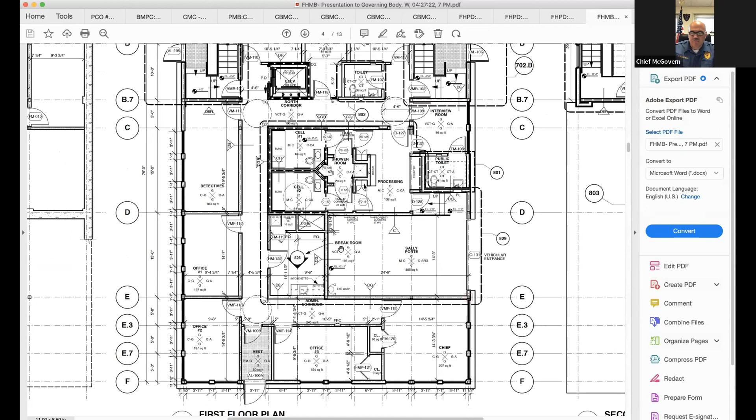So let me ask it this way: what bathrooms are not technically required according to state guidelines for police departments? Well, I think one of the things is that second bathroom downstairs is a handicap bathroom, so you're required to have at least 1 handicap bathroom on that floor. Eli, correct me if I'm wrong, but then we put a very small bathroom in the interview processing room. Correct, you can see that on the screen, right? Everyone see that? I see it, yes. These are the ones required for the cell block itself. This was meant for the staff on the first floor, and this was meant for visitors.

Are they all required? Well, these are absolutely required. You should have something for the public, as to whether, there's no code requirement for one for staff. I suppose you could perhaps consider this one as optional.

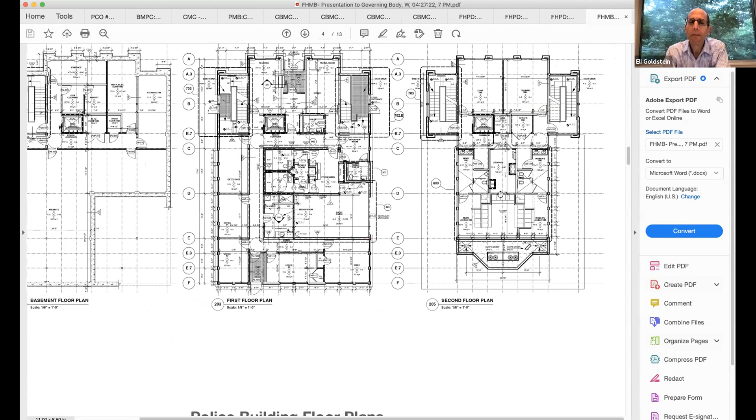And then what's the cost per square foot on the excavation and foundation work? Because I think we need some basement, but what was the cost per square foot so we could start to understand? I couldn't tell you that off the top of my head, I'd have to go through and pick pieces out of the estimate. It's the cost of excavating, the cost of drainage, the cost of waterproofing, the cost of the concrete, all those costs. It's not an easy answer.

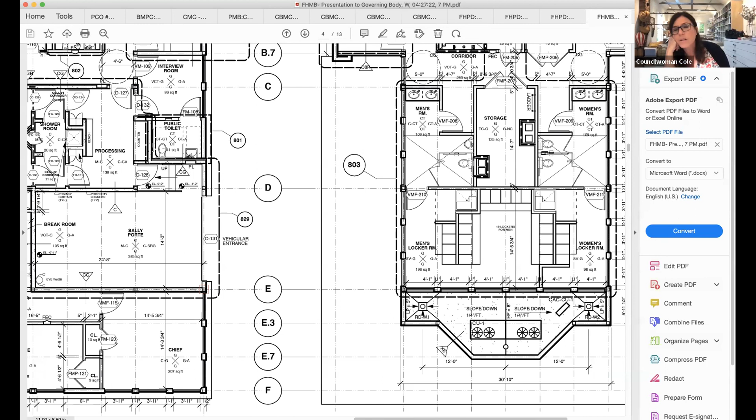So where can you limit the basement without dramatically altering the structure itself? Let's look at the basement.

Right now you can see there's structural columns here, and there's a structural frame above this area, that's the area of the storage. So to change this and get rid of this part of the basement would affect numerous drawings, both architectural, structural, mechanical, electrical, site. It would affect dozens of drawings to eliminate this.

Well, it's a shame we didn't also get the specs affected before now, but elimination of doors and frames and hardware... so what I was asking you, because I certainly understand that, but...

Where can we limit the basement? Perhaps on that south side here. Is there any way to limit the basement? If you got rid of the storage area, the basement could end here, and everything above it would stay and everything down here would go.

It would be good to understand what the savings may be. We do have other buildings that can receive storage, but Chief, can you tell us how critical the storage in the basement is?

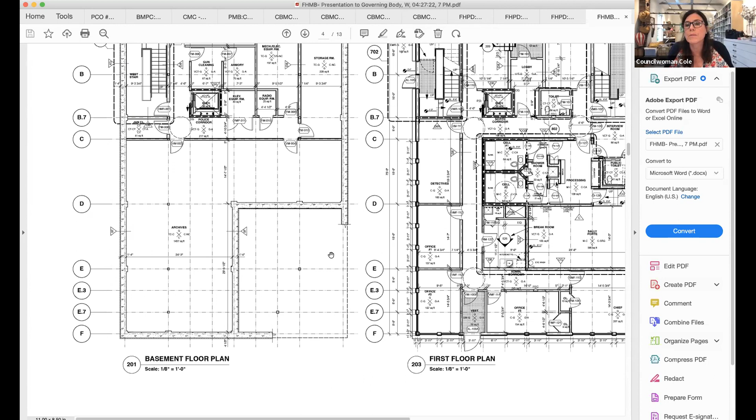All right, I did hear Eli say that. I feel we're in a difficult position because we have an expensive building and an expensive time to build buildings in a community that doesn't have a lot of money to fund buildings. So perhaps the other council members have some ideas. I'll circle back if I have any more questions.

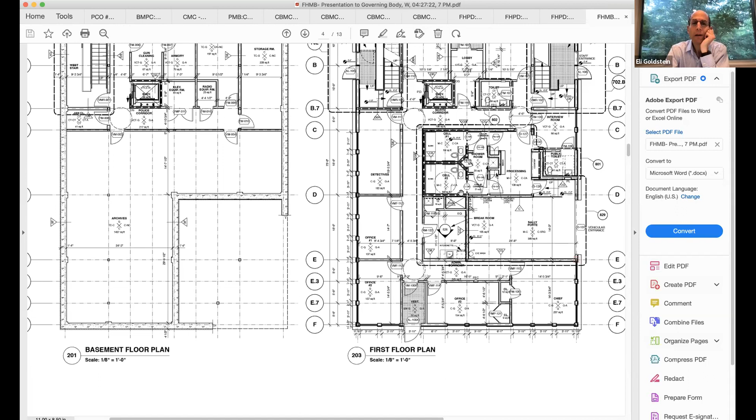Eli, do you remember how much the change in cost was when getting rid of that basement area to the west of the Sally Port? Was there a delta on that? I don't recall. Don't recall.

All right. Other question, you said residential siding. Can you specify what kind of siding we have? Is it Hardie or is it vinyl? It's Hardie board, yeah. What's the life expectancy compared to Hardie board versus vinyl? Is there a difference?

Well, actually, I just went through this on another project. I think they have pretty much the same length warranty, but the problem with the vinyl is that it needs a smooth surface in which to attach it. And there was a code change a couple of years ago, which requires us to put what's called continuous insulation on the outside of the studs before we put on the siding.

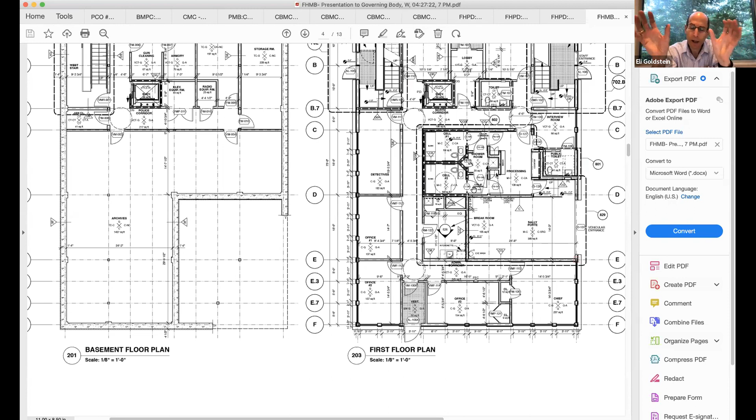And the system that's specified and detailed is one in which there are, this is a term of art, things called girts, which are like channels every 16 inches, which hold the continuous insulation to the studs. Those channels have thickness to them, so as a result, we do not have a planar surface. There's a bump every 16 inches. So we don't have a planar surface to attach vinyl to. As a result, we'd have to completely redesign the innards of the exterior walls if we wanted to go with vinyl.

Okay, thanks for that explanation. No further questions. Thank you, Councilman McHugh.

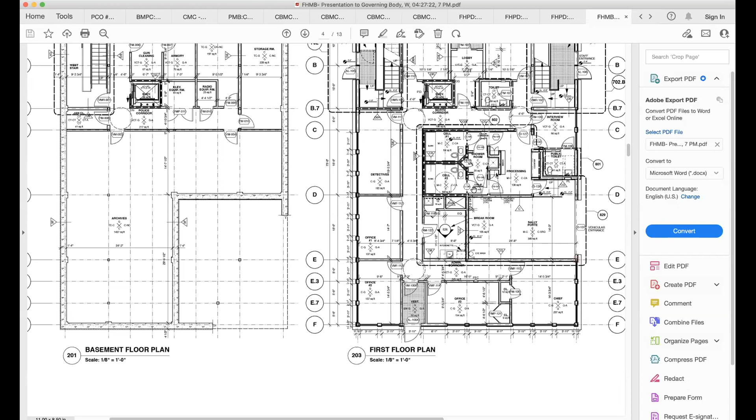Sure, thank you so much for that feedback. I appreciate it.

Councilwoman, do you have more questions? No, I guess nobody else has any feedback from the committee. Okay, thank you, Councilwoman. Eli, I think now would be a good time to talk about that back building.

Mayor, sorry, sorry, I know I did have an additional comment or question, sorry.

Councilwoman Cole, I just want to echo some of your comments that if there are opportunities for savings that make sense, a lot of small things can add up to a larger sum, and to the extent it's possible, that would be super. Also, I think we should be mindful of the mounting and increasing costs that are continuing, and I support proceeding to get this project initiated, shovel in the ground as soon as we can, but obviously with a mind and eye toward where we can make decisions that will impact the savings.

Do we currently have a plan for who will be primarily responsible for making decisions like that?

Such as this toilet or that toilet, this one's $500, that one's $1,000, things like this. Well, I would suggest, and I don't know who's prepared to answer that question, but in my mind, I thought we could do some items as an add alternate when we bid it out. So for example, the masonry stone siding, that could be an add alternate, and we can understand the cost difference. Actually, that would be very hard to do.

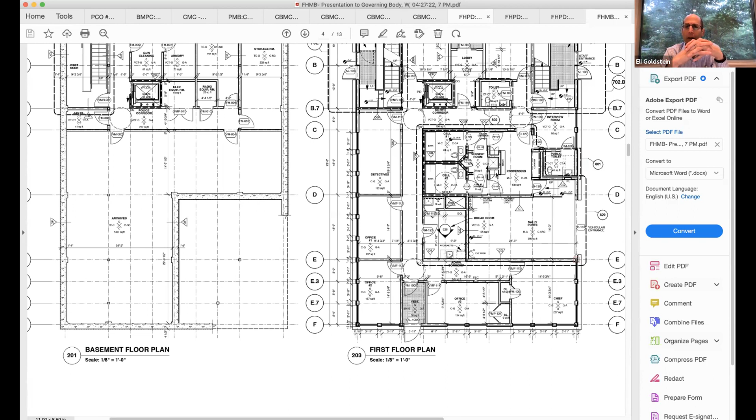So that's one of the reasons why we discourage alternates that are relatively small in the overall scale of the project. For instance, while it would be true that the bathroom near the front lobby of the police department, if it weren't outfitted, you might save, let's just throw out $15,000, if it didn't have the fixtures and tile in it, that's a drop in the bucket in a $10 million job. So whether that should be part of this ranking system, you'd have to decide for yourself.

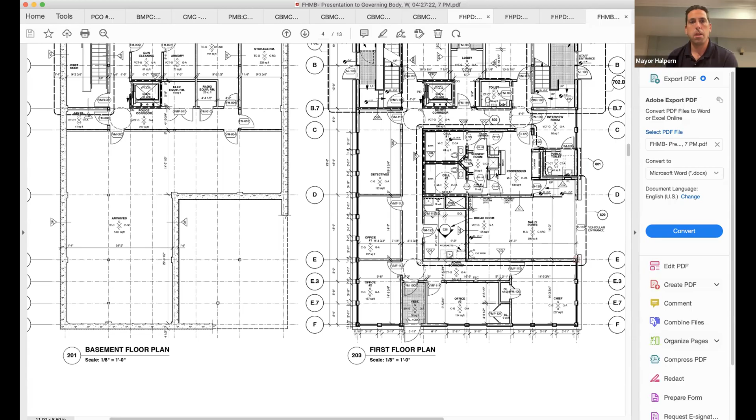Thank you. With no more questions on this topic and limited amount of time, I'd like to move on. Eli, if you can present on what was originally a back storage building and now has been discussed as possibly being meeting space. I do want to keep in mind that Eli was not asked to design this back building. He was just asked to give us an idea of whether it was doable within the open space, or within the ROSI space we had the restrictions on, and whether or not a general estimate on a budget of what the first design versus the enclosed community center space would look like.

So bear with me just one second. Everyone see that? Mhm.

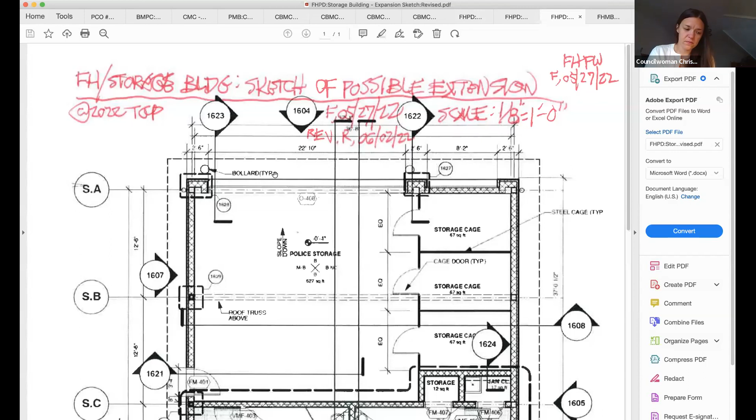Okay, so as we discussed in the last meeting, as currently designed, there's a patio here that's 20 feet deep and 37 feet wide. And what we're asked to do was to add a bay of another 10 feet here, making a room that was 1,100 square feet as a multi-purpose room.

And then we proposed adding doors out here and here. So you have these two means of egress, which we're required to have, and you come through a vestibule to get in the building.

Then we also tucked a kitchenette here. The plumbing in the bathrooms, of course, was part of the original job. This was a good place to put the kitchenette because it's recessed and can tie into the same plumbing as the rest of the building, and still maintain barrier-free access to the bathrooms. So, and of course we can fine tune this, but this was the basis for our estimate.

So we asked our consultants, site and civil engineer, structural engineer, mechanical and electrical engineers, and we all went through and figured out what the implications of this would be. It adds foundations, it adds roofing, it adds roof structure, it adds columns, it adds walls and windows, it adds doors, frames, and hardware, it adds the kitchenette, it adds a ceiling, it adds flooring.

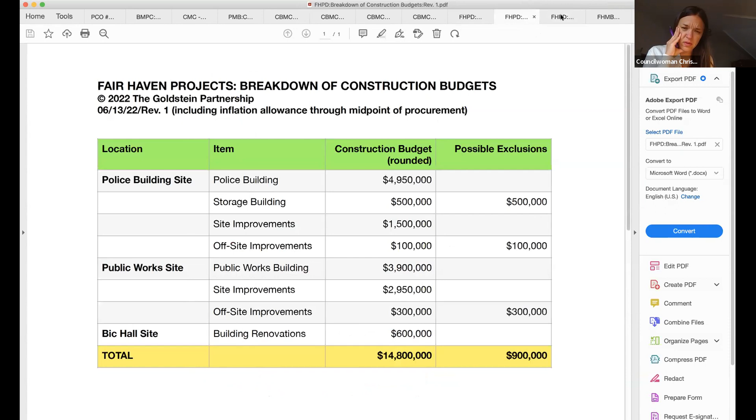Size-wise, is it comparable, smaller, or bigger than the existing community center building space, floor space? It's a little smaller, just slightly smaller, 200 square feet.

One of my comments, just so I can understand it, is the kitchenette open to the room? Is that accurate? It's more like a bank of cabinets, right here, and whatever, refrigerator.

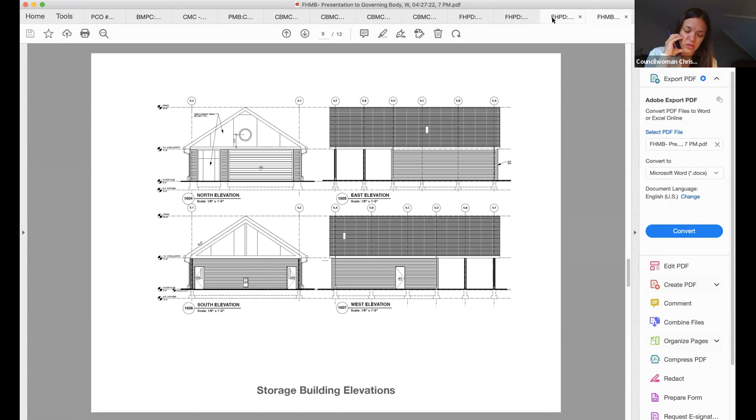Is the concern that you don't want to see it always? Or that if you are kicking a ball around or whatever, you might knock over the thing of milk? What I would like to suggest, if we want to get the most use out of the room, is we could just put a big set of doors that you can flip open against the walls and close it when you don't need it. But we're trying to keep the room as unobstructed as possible to give you as much flexibility as possible.

What are the dimensions? 30 feet this way and 37 feet this way. Okay.

It's hard to tell from this drawing. Are there windows proposed? Yes, there are windows proposed around these sides. Is that at a certain height above ground level? We haven't designed it yet; we just made an educated guess as to how big they would be.

Correct me if I'm wrong, but I don't see any storage space for the multi-purpose room. Currently none is shown. We could certainly add it, but that would just add a few dollars more.

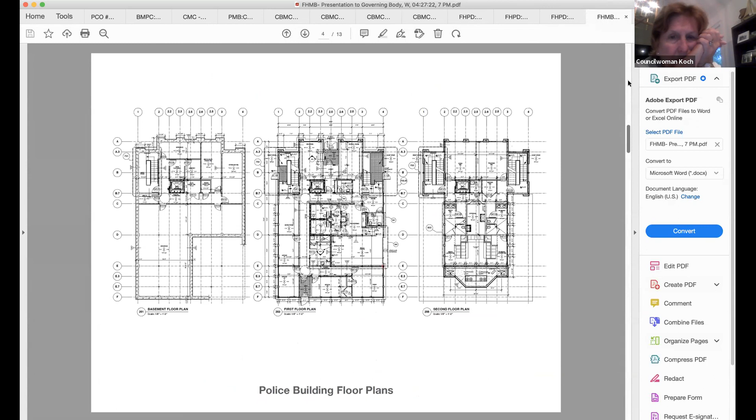So I just want to make one comment, and I agree the current configuration needs to be refined, but keep in mind my understanding is that you want to be able to get to the bathrooms and use them even if the multipurpose room is closed. So there's going to have to be some combination of interior and exterior doors so you can use the bathrooms as an adjunct to the multipurpose room at times, and other times use them from the outside without going through the multipurpose room. Keep in mind these two different modes have very different access requirements.

That's on the top of my mind. And for access too, Eli, would pulling that middle part out and kind of tacking it onto the end help? Let me tack it on here. So just taking out that whole middle part and putting it at the end of the building. When you say the middle part, what are you referring to? The bathrooms. Oh, this whole thing, you mean? Yes, and moving it here? Yes.

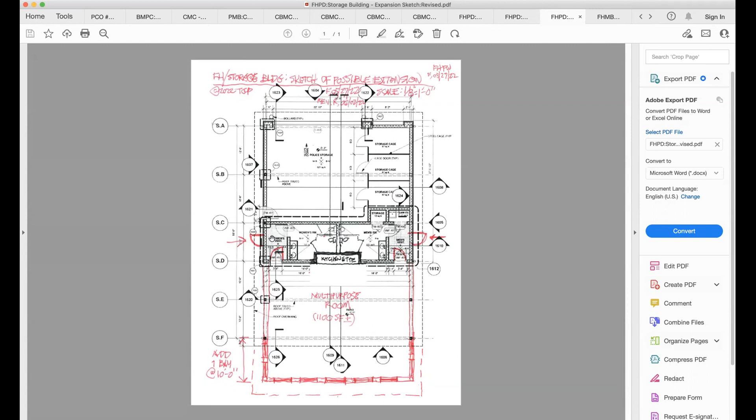But it's going to take a little bit of room out of the multipurpose room. So if you put it on the other side, the kitchenette side, and you created the breezeway there, move the kitchenette - I mean, if we're talking about $350,000, why not add another 5 feet to the building? Just push the building out to create the breezeway. I think that's a very good idea, and that will solve everything, I think.

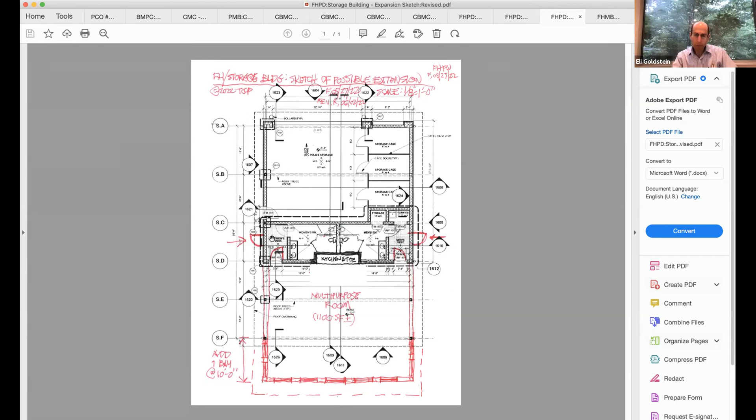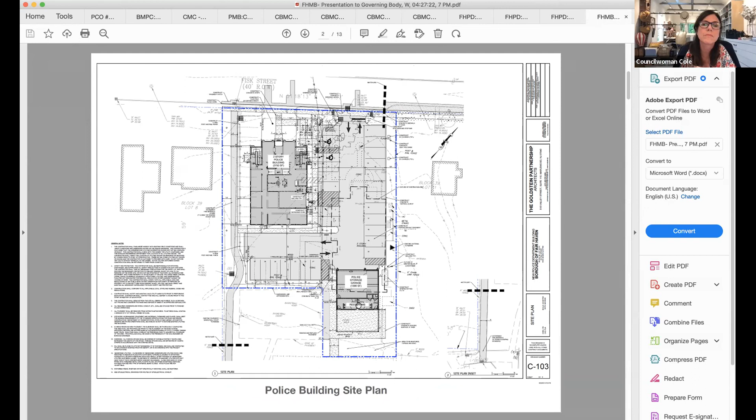We're constrained, don't forget, by the fact we can't go into the park area. So we gotta make- Understood, but if you look back at the site plan, this was 20 feet. So it looks like there's about another 20 feet, that's fine. And we're already coming out 10. If we come out another 5, we should still be okay.

Eli, you did mention the possibility of doing this building as an addendum if we wanted to get the bid out faster. Is that still a thought or not? That's still a thought. Obviously, we wouldn't want to go out to bid until we make these changes because they're pretty substantial. Just so we're clear, you'll have to send us a proposal for the additional work?

I sent you an email with the order of magnitude of what the fees would be and the construction, that was on June 3rd. Right, but you didn't actually send us a proposal to approve - the governing body would have to approve that. Right, and I would have to go back to our engineers, come up with a sketch that incorporates all this, have you approve it, then go back to our consultants to figure out if any of what we're doing changes what their fees would be.

May I ask a question briefly to Eli? Yes, we got 3 minutes.

Eli, if you do the breezeway and go out the extra 5 feet, can you eliminate that door on the east side that is closer to the neighbor? I'm thinking whether we can change the circulation so nobody needs to go behind the building. I hadn't thought about that, but thank you, Councilman McHugh, for mentioning it. If we could avoid circulation on the back, that east side, it won't bother the neighbor and it'll help maintain the roof line, keeping the building as low profile as possible - people thought the earlier rec center idea was humongous, so something very low profile is better. I don't think it'll be a problem to get rid of that east door if we put in the breezeway.

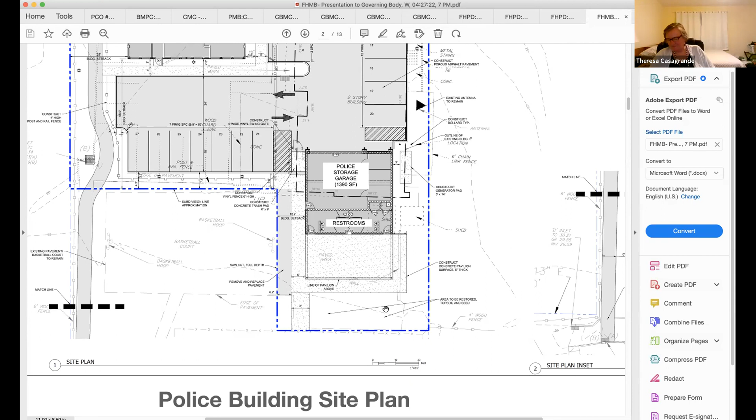Sonia? So I know in that area there's a wall used for tennis and lacrosse where people practice. What's the impact to that wall? Because we've talked in the past about it coming down and being rebuilt - so what's the impact to that wall? That wall is coming down, it's right here, that's where the wall is. Sonia, it's already, I believe, kind of crumbling and falling apart - yeah, absolutely, it needs to come down for sure.

But I know we had talked about - I think there was an organization, and maybe one of the other council members may recall this - where an organization wanted to partially fund putting that wall either there or somewhere else. I was wondering about that, because when it comes down people may wonder what the alternate location would be. Yeah, I could speak to that, Sonia. That's still a possibility, the rec committee was reviewing it for a while. It had been previously approved by prior governing bodies, and we're working on determining whether or not it can be achieved. At the time it had been proposed at Fair Haven Fields.